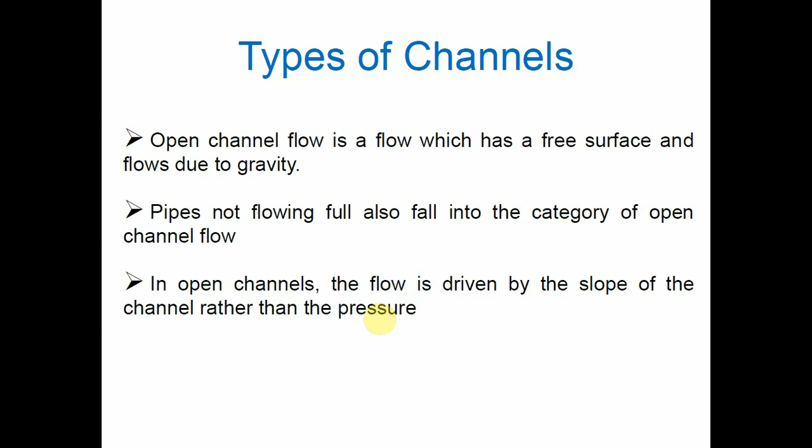Then types of channels, also called classification of flow in the channel. The open channel flow is the flow which has a free surface and flows due to gravity. Thus, pipes not flowing fully also fall into the category of open channel flow. In open channels, the flow is driven by the slope of the channel rather than the pressure.

Okay, so open channels are of two types. One is natural open channel, which may be of irregular shape, and another one is artificial channel of a regular shape. Natural channels of irregular shape can be located in rivers, hillsides, tidal areas, etc. Artificial channels of regular shape can be obtained by drains, culverts, sewers, and tunnels.

So artificial open channels are created by man, whereas natural open channels are created by nature or obtained naturally.

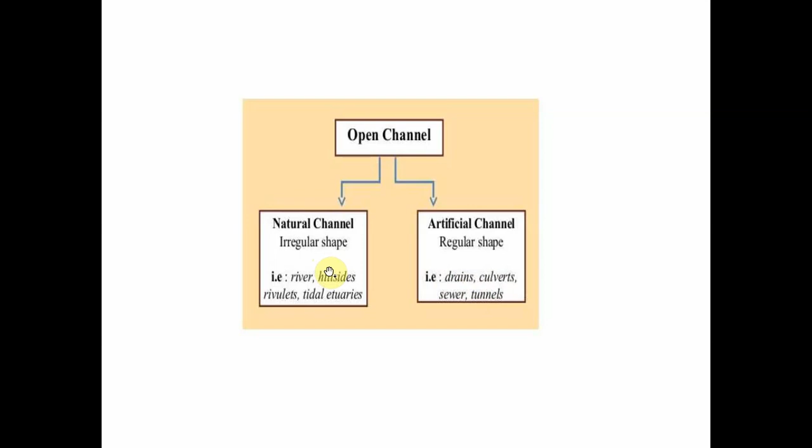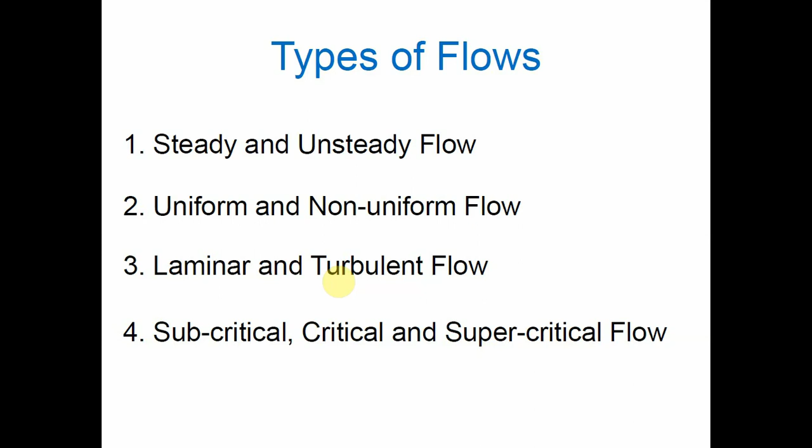Okay. Then types of flow. Mainly the flow in open channels is classified into the following types based on the characteristics of the flow with respect to space and time. First one, steady and unsteady flow. Second, uniform and non-uniform flow. Third one, laminar and turbulent flow. And fourth one, subcritical, critical and supercritical flow. Okay. So first one is steady and unsteady flow.

The flow in open channel is said to be steady if the flow characteristics such as depth of the flow, velocity of the flow, rate of the flow at any point in an open channel flow do not change with respect to time. Mathematically it can be written as ∂y/∂t = 0, ∂V/∂t = 0, ∂Q/∂t = 0, where y is the depth of the flow, V is the velocity of the flow and Q is the rate of the flow. The flow is steady if the depth does not change with time.

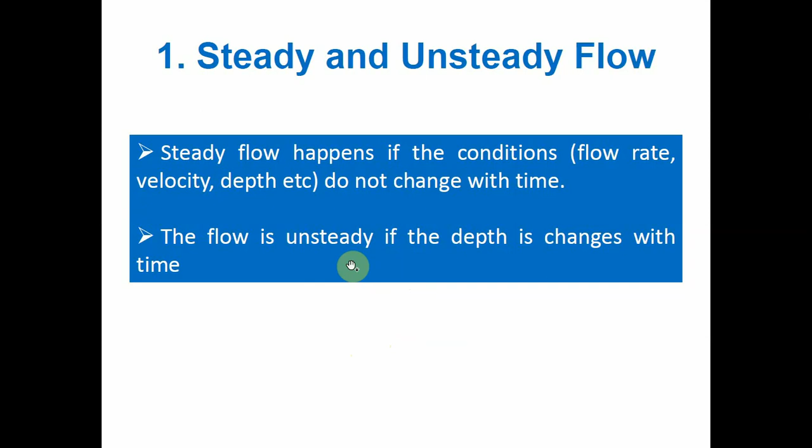Next one, unsteady flow. The flow is unsteady when the depth changes with time. That is, if at any point in a channel flow, the flow characteristics such as depth of the flow, velocity of the flow, rate of the flow change with respect to time, the flow is said to be unsteady flow. Mathematically, that can be written as ∂y/∂t ≠ 0, ∂V/∂t ≠ 0, and ∂Q/∂t ≠ 0. That is unsteady flow: depth changes with respect to time.

Second one, uniform and non-uniform flow. If the velocity of the flow, depth of the flow, slope of the channel, and area of the cross section remain constant for a given length of the channel, the flow is said to be uniform flow. That is, if for a given length of a channel, the velocity of the flow, depth of the flow, slope of the channel and cross section remain constant, the flow is said to be uniform. Mathematically, ∂V/∂s = 0.

Non-uniform flow: for a given length of the channel, if the velocity of flow, depth of flow, slope of the channel, and area of cross section do not remain constant, the flow is said to be non-uniform flow. Mathematically, dou V by dou s does not equal zero.

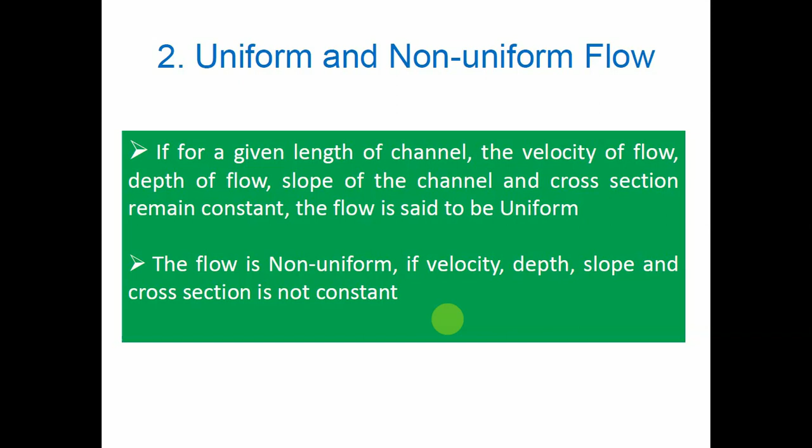Non-uniform flow in open channel is also called varied flow. It is further classified into two types: gradually varied flow and rapidly varied flow.

First, gradually varied flow: if the flow characteristics of the channel change gradually over a long length of the channel, that is, the depth of flow changes gradually over the length of the channel, it is called gradually varied flow.

Then rapidly varied flow: the flow in which the characteristics change abruptly over a small length of the channel is called rapidly varied flow. That is, if the depth of flow in a channel changes abruptly over a short length, it is called rapidly varied flow.

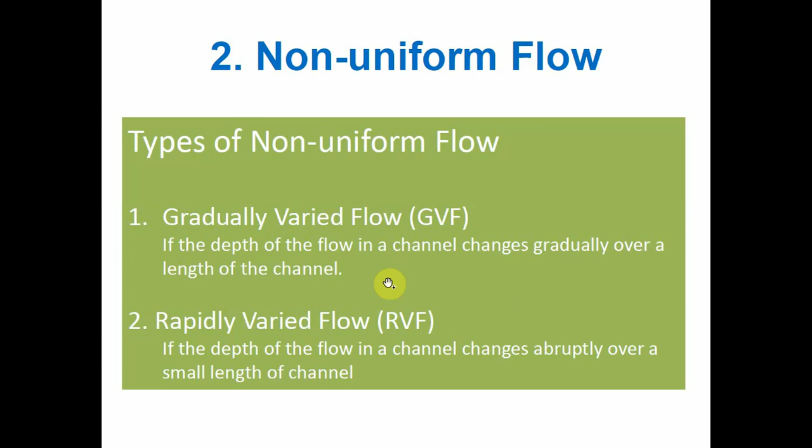So this is the diagram for uniform and non-uniform flow. In uniform flow, the flow direction remains uniform, while in non-uniform flow, due to an obstacle present in the middle or due to change in velocity, the flow becomes abrupt and rotational. So in this channel, part of it represents uniform flow and the other part represents non-uniform flow.

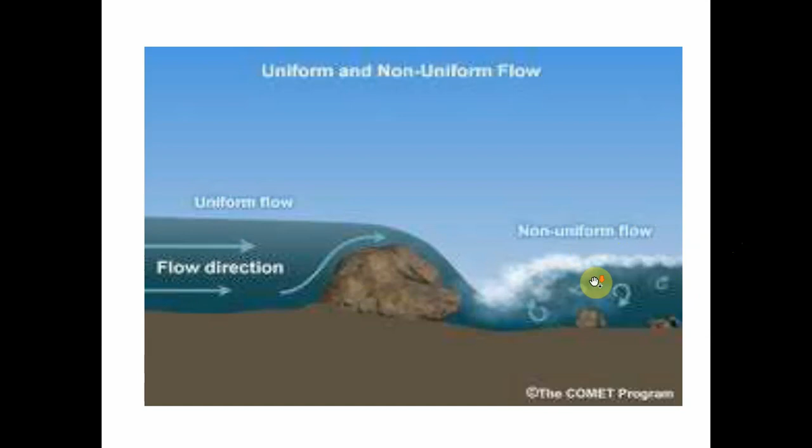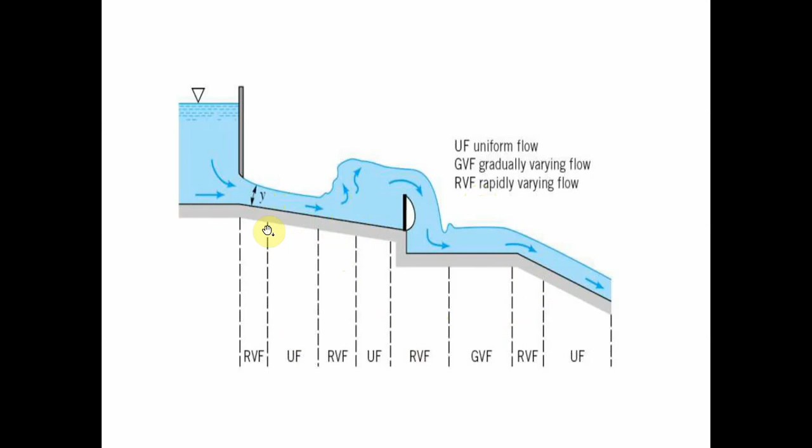Third classification is laminar and turbulent flow. The flow in an open channel may be classified as laminar or turbulent depending on the Reynolds number, that is, the ratio of inertia force to viscous force.

When Reynolds number Re is less than 2000, the flow is laminar; when Re is greater than 4000, the flow is turbulent; and when Re is between 2000 and 4000, the flow is transitional.

Both laminar and turbulent flow can occur in open channels depending on the Reynolds number, given by Re = rho × V × R / mu, where V is velocity, rho is density (1000 kg per meter cube for water), mu is dynamic viscosity, and R is the hydraulic mean depth, given by A upon P, that is area divided by wetted perimeter. In some books, R is denoted as M, the hydraulic mean radius or mean depth.

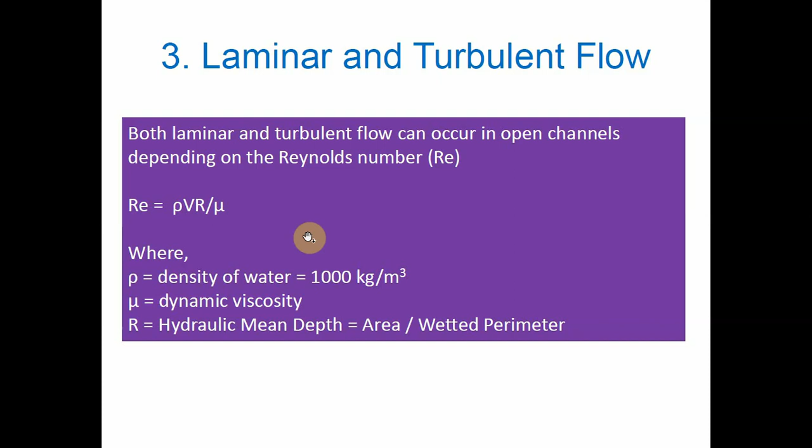So this is the turbulent flow. See this arrow marks how the water will be flowing, and this is laminar in a straight line, and this is in a curved line. Difference between turbulent and laminar flow.

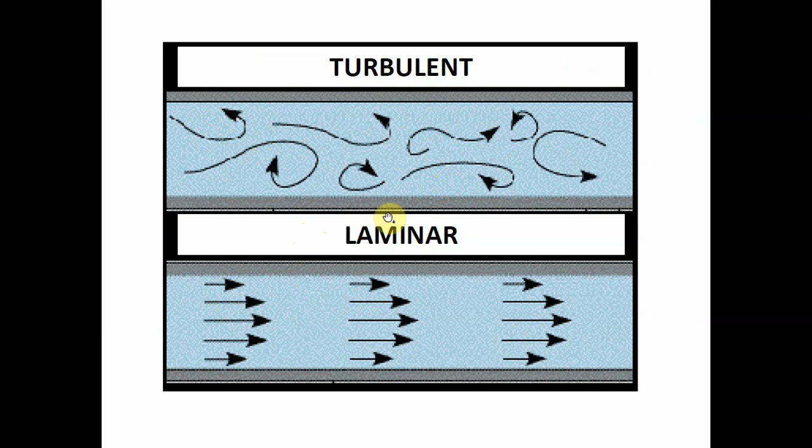Here Reynolds number R is equal to rho into V into R divided by mu, where V is the average velocity of the fluid flowing, and R is the hydraulic mean radius of the channel. Therefore, for laminar flow R is less than or equal to 500, transitional flow is for R greater than 500 and less than 1000, and turbulent flow is for R greater than 1000.

So next one is subcritical, critical and supercritical flow. The flow in an open channel may be categorized as subcritical, critical and supercritical depending upon the Froude number. In the previous case it was Reynolds number; when it comes to subcritical, critical and supercritical, it will be based on the Froude number.

Since gravitational force is the predominant force in channel flows, when Froude number F is less than 1, the flow is subcritical. When Froude number is equal to 1, the flow is critical, and when Froude number is greater than 1, the flow is supercritical, or shooting, or rapid, or torrential.

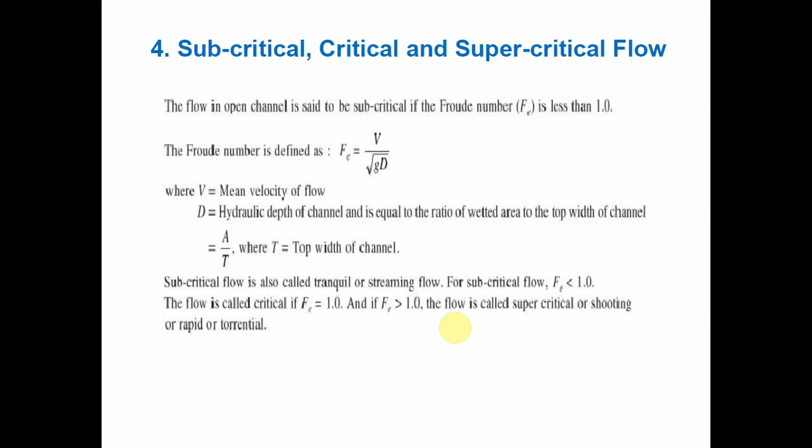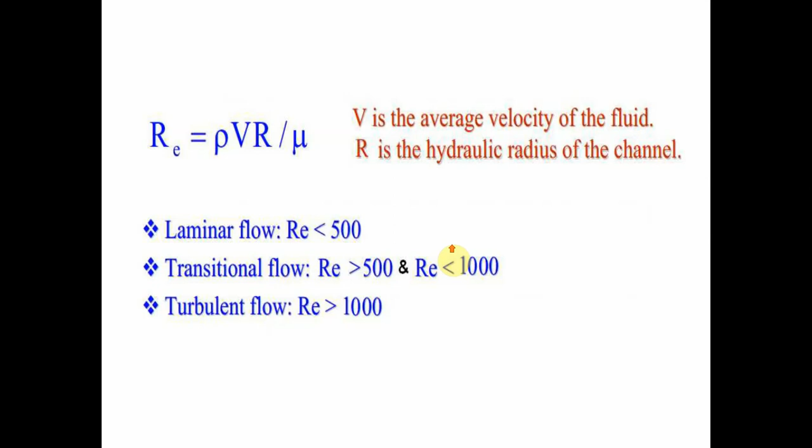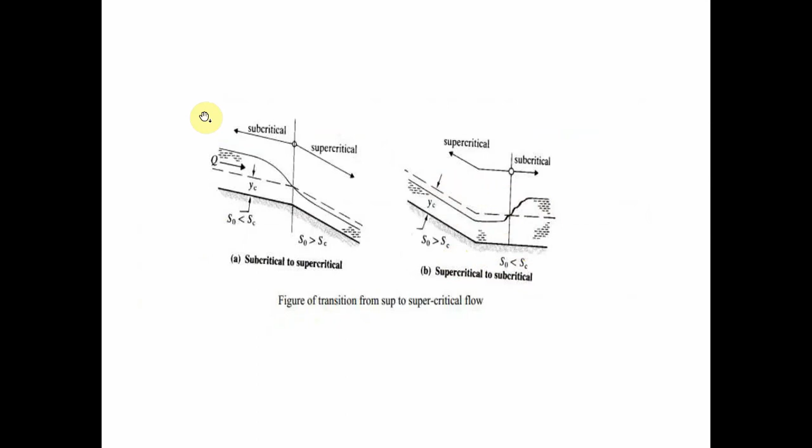So when SO is less than SC, that means subcritical flow. When SO is greater than SC, that means supercritical flow. Similarly, here it is normally uniform, and here it is slightly enlarged, and the depth goes on increasing here. So in this supercritical case, SO is greater than SC, and in this subcritical case, SO is less than SC. This diagram represents the supercritical and subcritical behavior.

Similarly, the type of flow needs control. If SO is less than SC, then depth Y is greater than critical depth YC, that is subcritical flow. If SO is equal to SC, then depth is equal to critical depth, that is critical flow. Then if SO is greater than SC and depth is less than YC, that's supercritical flow.